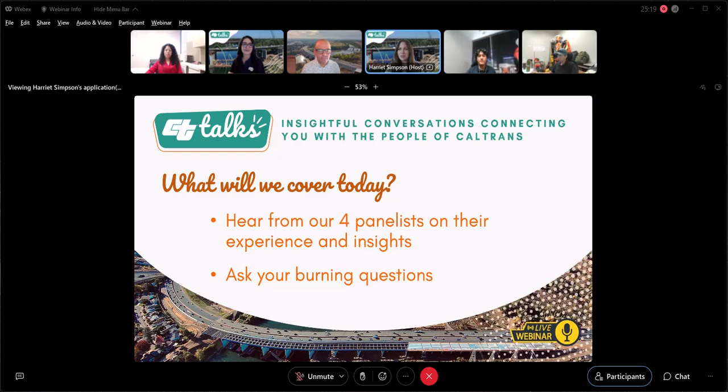And as Laura said, you're going to have your opportunity to ask your burning questions, which we will pause to get to throughout the webinar. So without further ado, we've got 4 incredible panelists with us today: Luis Guzman, Mayra Velasquez Cano, Ivan Young, and Jimmy Ngo.

Hi, everybody. Welcome. Hi, thank you for having us. Hi, everyone. Welcome, welcome. Thank you so much for being here with us today.

So we've got some brief bios to share with you all today so you can learn a little bit more about our panelists, and then we're going to dive into our questions about this amazing project. So I'm going to kick it to Laura to start us off with the biographies.

It's my pleasure to introduce you to Luis Guzman. Luis is a transportation engineer here at the Office of Structure Construction in Sacramento. He holds a Bachelor of Science in Civil Engineering from California State University, Fresno. As a structure representative, he oversees bridge construction projects, ensuring quality and adherence to contract standards. His expertise includes 3D modeling, project management, and strong interpersonal communication skills for project success. Outside of work, Luis has a deep passion for automotive and motorcycle mechanics. He is often found in the engines and customizing vehicles. He also loves the thrill of driving and riding, appreciating the engineering and the freedom these machines provide. His favorite pastime is creating great memories with friends and family. Thanks for joining us today, Luis.

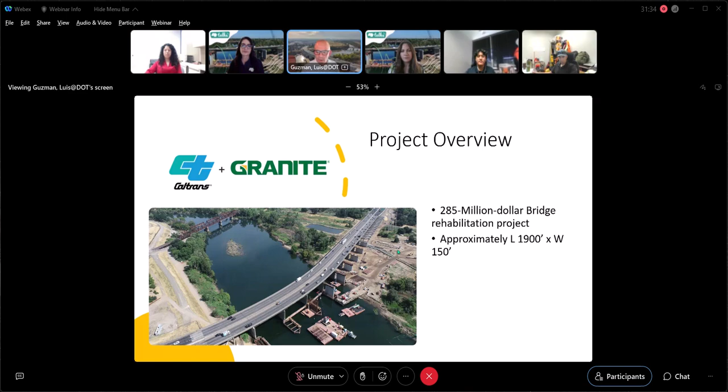It's for the American River Bridge project. This is a CMGC project, a joint venture between Granite and CEC. It's a $285 million bridge rehabilitation project. The purpose of the project is to replace the existing deck that has been identified as something that needs to be updated and brought up to current standards. The bridge is approximately 1,900 feet long and 150 feet wide.

I'd also like to thank Mihai. He's our Mets representative, so he was instrumental in the fabrication of the steel. He made sure that everything was fabricated according to plan and specifications. Mark Okamura and Wes Sennett, they're the bridge designers for the project here.

Terry Harper, the office chief surveyor, specializes in remote sensing. He created a LiDAR scan of the bridge before we started construction. We needed to identify how much upward deflection we'd have when we removed the deck, and his LiDAR scans from when we started the project, compared to what we had after we demoed the overhang, allowed us to calibrate a very sensitive model created by the bridge designer. That was instrumental. So thank you, Terry.

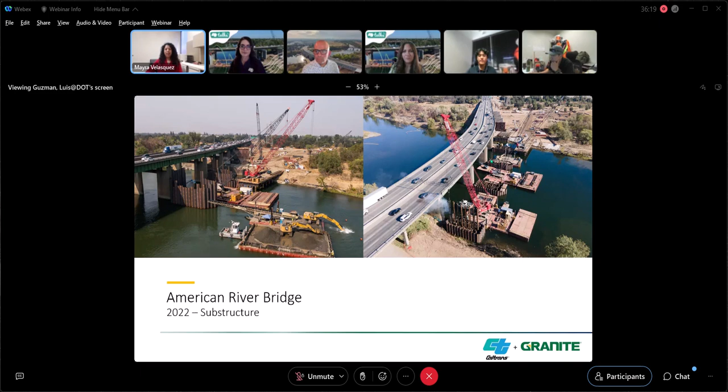Piers 8, 7, and 3 are temporary cofferdams. Piers 6, 5, and 4 are permanent and will be used for pier protection, which the existing bridge will also get from piers 6, 5, and 4. When I say they're temporary cofferdams, once we build the footing and the bridge itself, we're going to remove those sheets.

In this picture, you'll see that the contractor used the total station to locate the exact location of the cofferdam. These pins are temporary and will be removed. The next step will be to place the waler, which is a template that helps us guide the exact location where we need to drive the sheet piles. If the sheet piles don't go in the right location, we run the risk of the cofferdam not closing at the end.

The Caltrans surveyors take a big role in this portion, because without them, we wouldn't be able to construct the cofferdam where it should be. So thank you to all of them.

Ivan, do you want to explain the way the total station works? Basically, the total station shoots a laser into a prism, a glass prism, which does all the trigonometry and calculations for you, giving you the distances and angles of the exact point you're set up on, or that you're shooting. With that, we were able to input those points into our 3D model to confirm that things are where they're supposed to be, that the structure is being built where it's supposed to be.

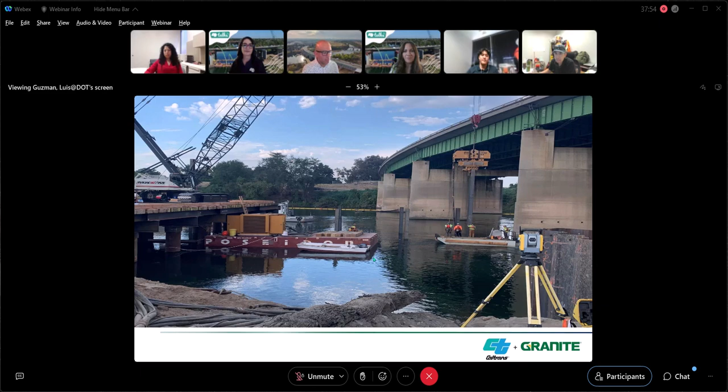Okay, next we'll talk about the superstructure work here. So what you see here is the barge, and it's setting the steel girders. These are 120-foot long steel girders. They were prefabricated and pre-drilled at Vigor, the fabricator in Washington, fabricated as part of a child project ahead of our parent project. We had to build all the substructure to be exact, and Jimmy will talk about the specifics.

These girders come in and fit perfectly, right? That's the whole goal, the whole purpose. So we use Trimble X12 to scan the girder itself. There's a design phase and then an actual fabrication phase, and we want to make sure everything is scanned into a 3D model to make sure it fits.

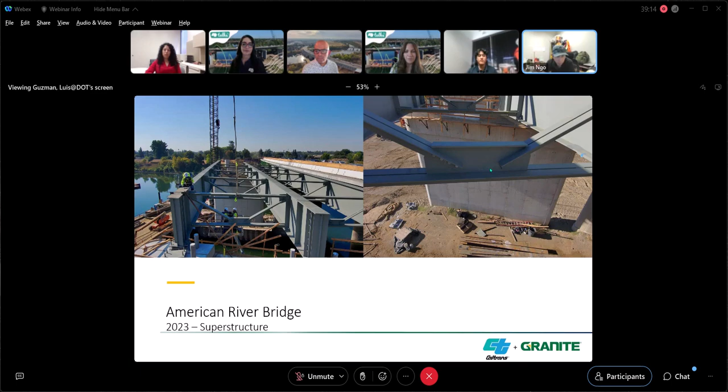Another technology we use is the drone. Whereas you slide these girders in, you have to brace them with the K-frames, and each K-frame is designed for a specific location as well as the bay. So they come and arrive on the job site with a tag, the manufacturer print on it, the number. We make sure they bring out the right number, and we have our team on the ground checking it. What I prefer is to mark a number on the steel K-frame.

When the contractor installs it and completes it, instead of the old days where we'd have a barge and a man lift, which takes hours to set up and bring you up there to check, you pop out a drone within 15 minutes and I know exactly that the K-frame is at the right location. You can see right there, it's marked CF2, span 8. That means at span 8, that CF2 is at that location.

So with the drone technology, it helps speed up this project very fast because we can cut down the inspection time dramatically. Here on the right, you can see all the bolts, making sure they are not loose, that they're properly tight. How do we get up so close? Drone, right? It can get very up close.

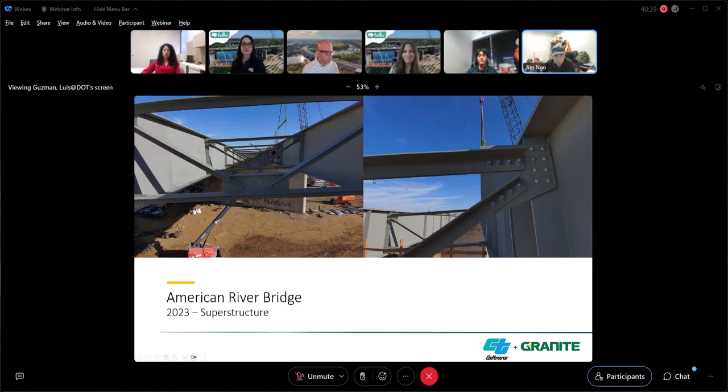Another innovation we use here: our typical process uses grading dowels for our decks. The way that typically works is you stick a piece of rebar or steel rod into the deck, put duct tape around it, and notch it. Then you use string lines to ensure the profile looks right, that the grading all looks correct. What we tried on this project is that both Caltrans and the ARC contractor used total stations and GPS units to set everything. So we graded the entire deck without any of the grading dowels.

We used a 3D model of the deck, and it was all dynamic, so you didn't have to have a specific location—you could walk anywhere on the bridge to set that. Jimmy and Mayra will talk about that.

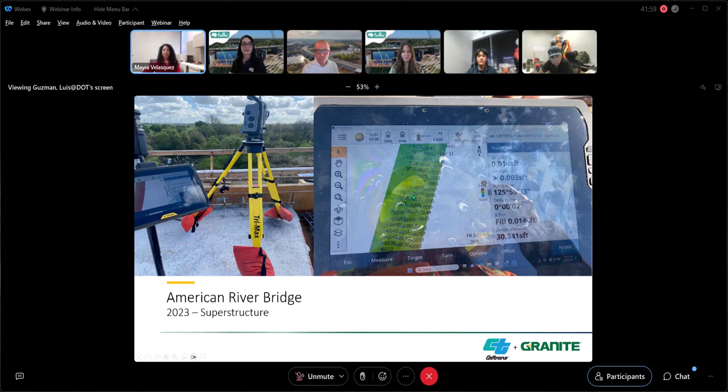Once Luis has given us the model, I go out to the field and start surveying. On your left side you'll see the total station, and on the right side you'll see our screen. Once I go out to the field, I first survey the girders, the top of the girders, and that will give me a fill. Once I get the fill, with these numbers, a contractor is going to be able to construct the pan decking.

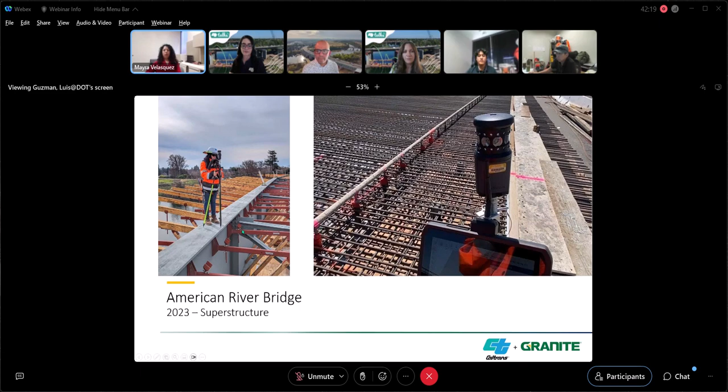Once all the rebar is installed on the deck, we go back and survey the overhang, the closure pour, and the bidwell railing. The really cool thing about this is that the total station can be used anywhere on the bridge, and it will tell us exactly how far we are from our target, so we can adjust it either up or down.

Also keep in mind that Caltrans and the contractor always compare our numbers before anything is finalized. So it goes through a couple of people before we say it's good.

Okay, we'll hand it back to you, Harriet.

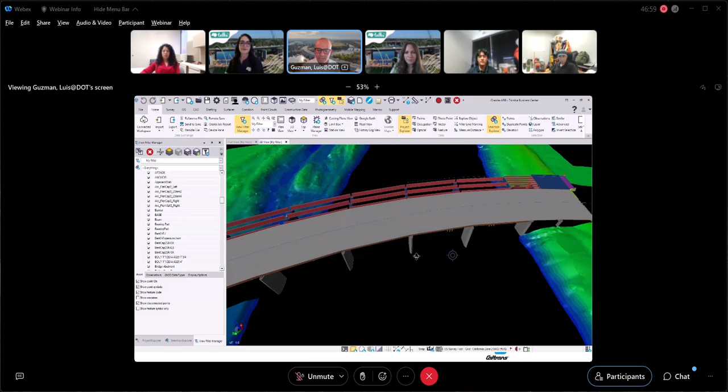They actually, here, let me share something, to give you a better idea of what that looks like. I'm going to share the model here. This model is a combination of 3D scans, the Tekla model, and roadway design, so it's a little bit of everything, but that's about how deep they go here. These were designed to go about 60 feet, and these are on piles. So this is kind of what you never really get to see, it's all underwater or underground. These are called piles, so we drive these piles down. These were CISS piles, so they're hollow. We drive them down, fill them with concrete and rebar, and then build the footing on top. That gives a lot more stability there. And then we pour walls, pier caps, and then our girders on top.

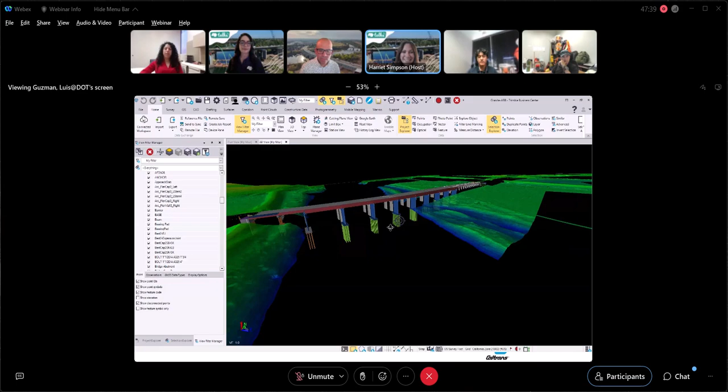Great visual, yeah, that definitely helps. It's been a struggle, I'm not going to lie everyone, Laura and I come from HR communications talking with engineers. It's been a struggle with our communication, but you guys are doing a phenomenal job making sure we understand all these different technical elements. We've learned a lot.

So I typed down the answer is actually 14 feet for the bike path. 14? Okay, yeah, for the bike path. Cool, okay, nice, all right.

Well, to jump into question two, you spoke a little bit about the innovations that have been utilized, but would anyone like to share a little more about maybe a few of your favorite innovations, or anything that has highly contributed to the success of this project? Good, Mayra, you start, I'll add on.

Surveying, maybe total station, data collector. We've used the total station a lot, it's really amazing, I've loved it. We used to do a lot of surveying with other equipment, old style. Now with the total station, you could go anywhere on the bridge and it will tell you exactly how deep, how far down or up you have to go. It doesn't have to be an exact location, you could go anywhere, and with this it will help the contractor build it. If we need to adjust it, we could adjust it right at the spot. It'll give us elevations, it'll give us the point exactly where we are. Yeah, I really love it.

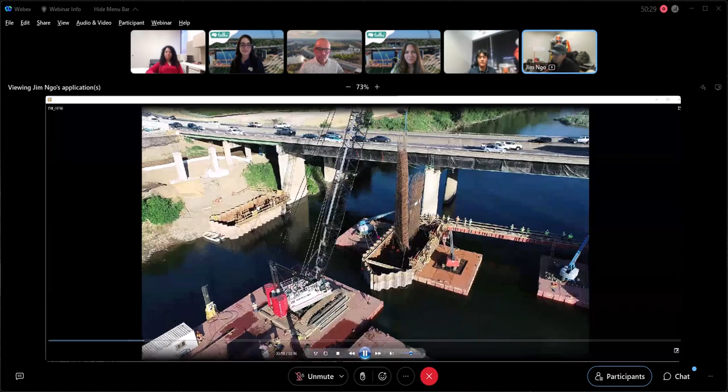All right, you save a lot of time with a lot of this inspection. You can see behind this, this is what I'm talking about earlier. You have to have a barge and a man lift and a boat take you out here to go up and inspect the K-frame and other stuff, like paint and so on. But with a drone, you can do that in 10, 15 minutes very quickly. It also provides a really nice visual video documenting the process and stages of how far the construction has gotten.

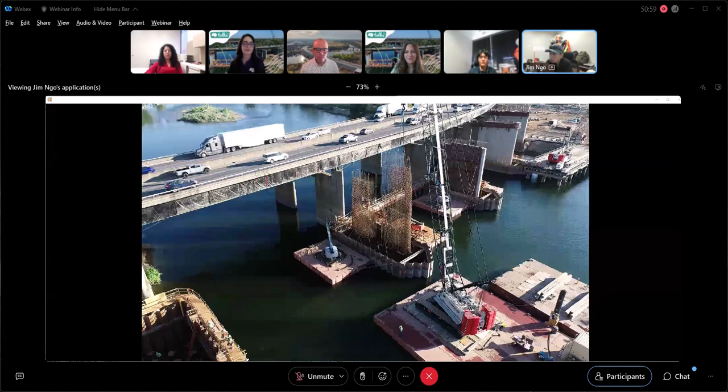And I always like to make those kind of videos to show the public, to say, oh, we did 3 cofferdams today and we're at the pier, we're halfway to the bridge, and you can kind of see the progress of how the construction on that project is going. So definitely drone is innovative.

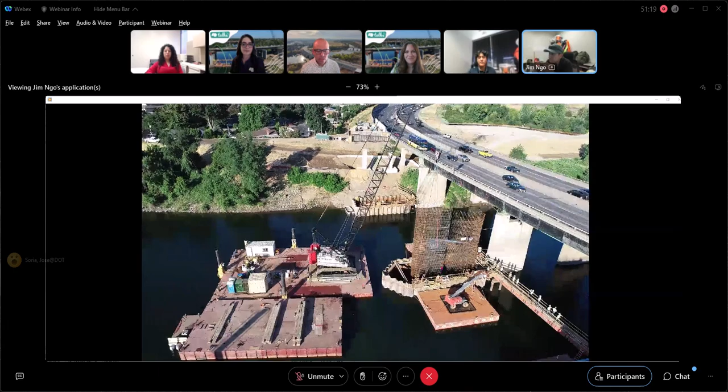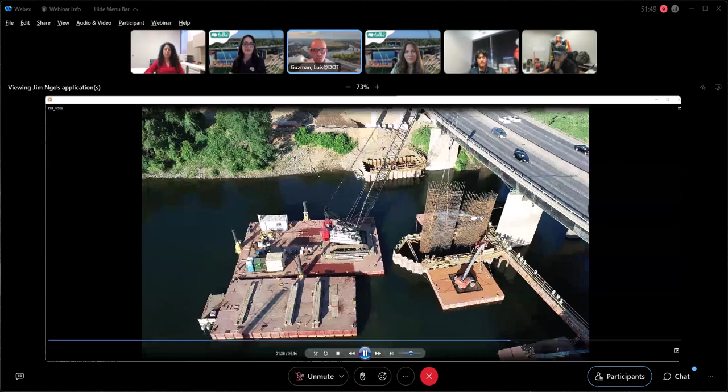There was also a couple situations where those large cages were guy-wired onto the sheet piles, and we couldn't really tell whether they were plumb or not, because they're so tall and you're down there in that cofferdam, it's really hard to see. So Jimmy went out and flew that, did an overhead shot, and we clearly could see that it was leaning. We were able to identify it was a safety aspect, stop the operation, and fix that safety issue. It was because of the drone that we were able to identify that and eradicate it.

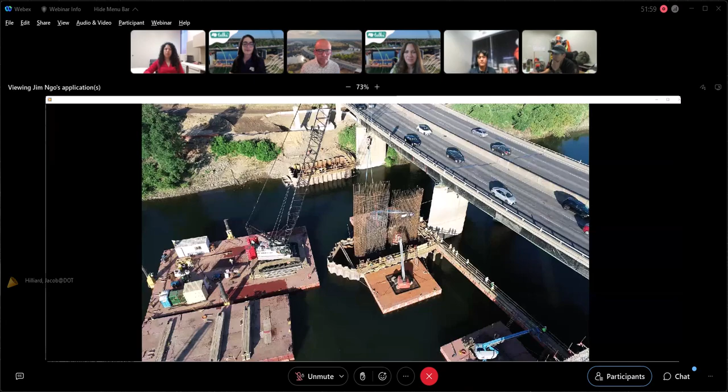Awesome. Well, while we're on the topic of drones, maybe we can tap the chat for a couple of those drone questions. Laura, were there any in particular that you saw? Yeah, they were just asking if drones were deployed for any of the activities, surrounding that. I think the guys did a really good job answering that and showing that great footage. But there is a question there.

I do have one maybe someone could address: they were wondering why there's still steel girders and not precast concrete girders used in the bridge.

Yeah, I'll go ahead and answer that. The reason is that the existing bridge is a steel girder bridge, so it was kind of designed to match the existing one. But having precast or steel girders does, by nature, expedite the construction, because if it wasn't, we'd have to build maybe a box girder bridge, which is a lot slower to build. So that definitely did expedite it, and we fabricated a lot of those girders before the project started. Like I was saying, we broke it up into child projects, and those steel girders were fabricated about 9 months before we actually started construction on site. So by the time we did that, everything worked out.

Normally you'd have to wait till you award a project before the materials are procured, so that would have added another season to the project had we not done that. So there's a cost savings and a time savings by doing that, and steel girders are definitely a lot faster to arrive on site and construct.

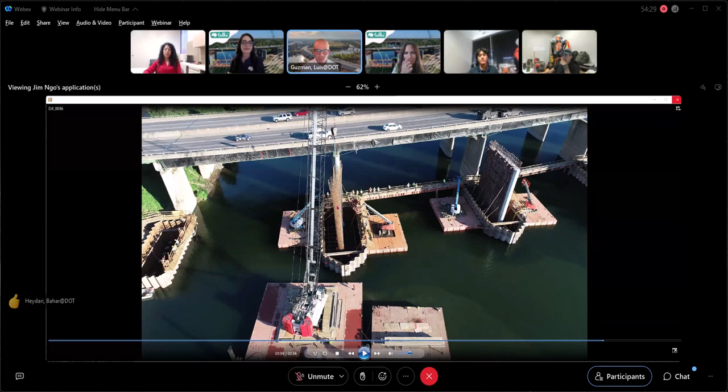It's northeast of downtown Sacramento, usually where the state fair is at, Cal Expo. It's right over crossing downtown Sacramento, into Arden. That's the best way to describe it. I could share a Google map if that might help see where the project is located.

Let me go to that and I'll share that. And while you're sharing, maybe if there's anyone local to the Sacramento area, give a heart if you've driven over this bridge since it's in its current state, because I know I did, and it's so smooth and comfortable to drive over. Has anyone in the audience driven over this bridge?

There you go, there you go. We just switched the traffic over literally about a week ago, so it's really awesome. I have to say, after we've been invited multiple times to come out there with you guys and do tours of the site, when I did go over the bridge, I was like, wow, it's open now. So exciting to be on top of it where we did the tours with your team. It's just amazing.

Nice visuals here, Luis, thank you. So this is downtown Sacramento here, you can see all the buildings, and this is where we're at, crossing over that river there. That's one of the main thoroughfares. We get about 100,000 cars that cross this bridge daily. Wow, so it's a main corridor out of Sacramento.

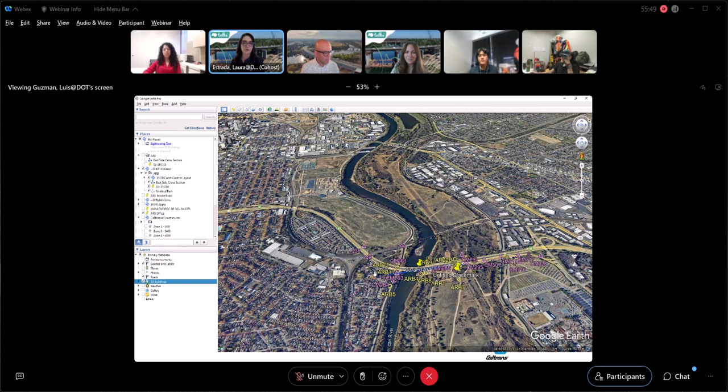I do have another question I saw in there. Maybe now is a good time, but they're wanting to know what difficulties did the team face while designing and constructing the curved segment of the bridge? I'm not exactly sure what by curve, what are we talking about, the bike ramp? It doesn't really say specifically, but just looking at the photo there, it looks like it's curved, I guess, and they're wondering if there's any difficulties.

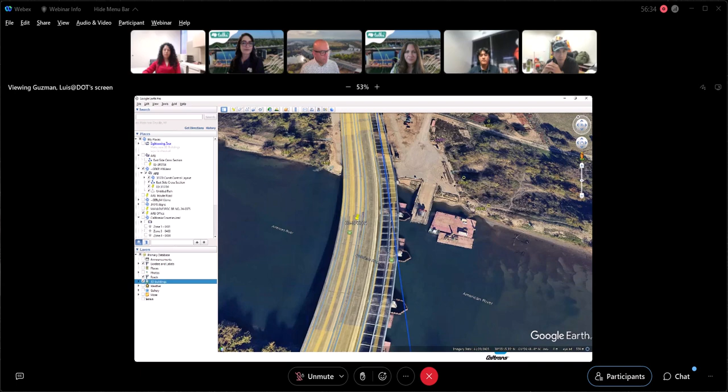Oh, I get it, part is the super elevation and the horizontal curve and vertical curve, Luis. Okay, that makes sense. We have 8% super elevation, right? So our girders coming in, a K-frame, everything is designed for that particular area. So like Legos, you have to match them exactly where they're at. So that's the difficult part, how do we make sure that things get like Legos correctly. That is one of the challenges.

If you could see the way it worked out, because of that super elevation, I don't know if you can see how much embankment there is, but it's at 8%. So what that means is every foot you move over, the elevation is 1 inch higher or 1 inch lower. So when it comes to erecting these steel girders, 1 inch could make a huge difference.

That's probably the biggest constraint we had on the project, and this 3D model and the roadway models, they all kind of put everything together. We could see if there was any conflict, and were able to address them before we actually constructed anything. There were a lot of challenges, and one of the main things was making sure everything lined up correctly, because everything was bolted on, so we had to make sure everything was geo-referenced correctly. That way, when they came in, the Lego blocks were perfect, they just snapped right in and then bolted up, and we were done.

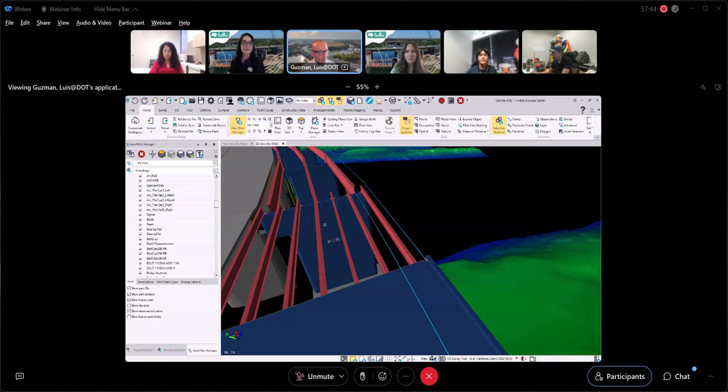Nice, it's just Lego blocks, right? Yeah, it's a little more complicated than Lego blocks. Keep in mind you have a super elevation, so now your anchor bolts have to be dimensionally different. So when you lay it out, that's also a difficult part, how you're going to lay out the anchor bolts correctly when you have an 8% grade and the pier is at a skew too. So you have all kinds of dimensions to play around with, and every pier you go from 8%, 7, 6, 5%, so it varies. You can't have one template for every single one of them. You have to almost custom your template for every pier and every connection with an anchor bolt for that girder, you need a particularly different template. So that's the difficult part.

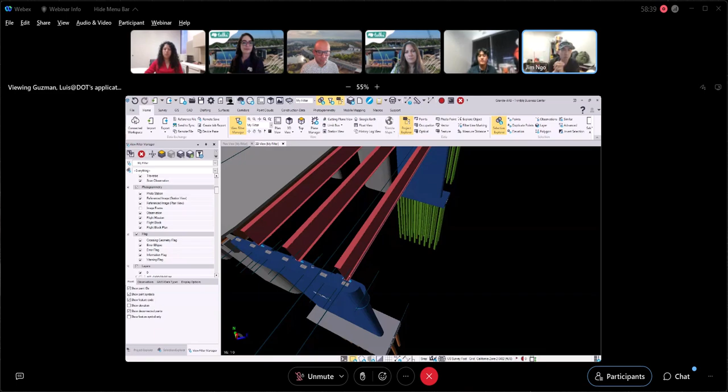And what Jimmy's talking about is this right here, and that's where these 3D models are just absolutely priceless. There, you see how those bolts are shown. Every one of these girders had a plate that was welded on the bottom, and they had pre-drilled holes, and those holes had to go right over this anchor bolt.

So that was the difficulty, being on a super elevation, a vertical curve, and a horizontal curve. The geometry was all different, so the girders were at different bearings, meaning they weren't parallel to each other. The elevations were different too. It was complicated, but it all worked out.

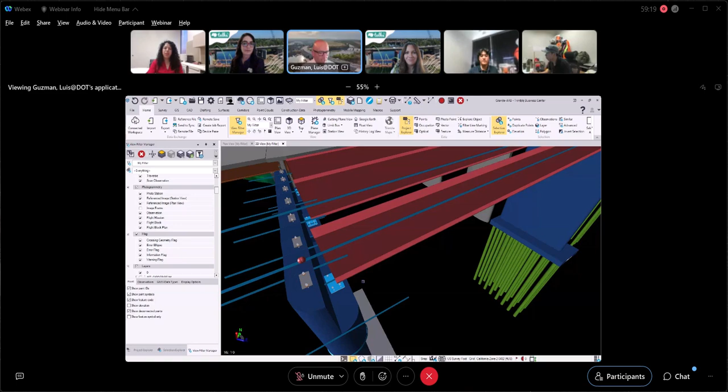One thing I want to add is that you have all this advanced technology, but it doesn't tell you how to do it. You technically have to know how to do it. The machine is for you to verify it. So at the end, you still need to know how to build a bridge. You use advanced technology to verify your work.

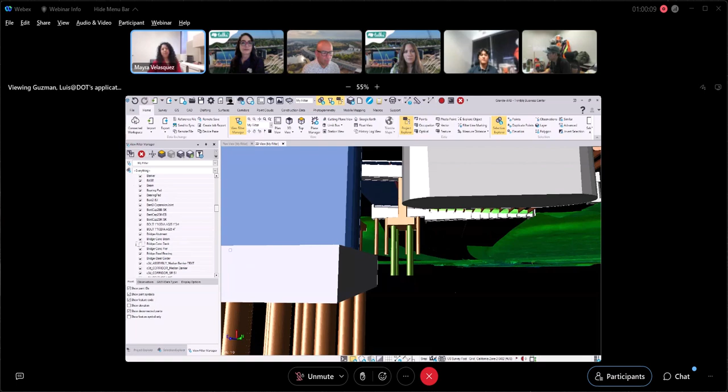Let's make that clear. I also want to add that the total station helped us extremely because, as Luis said, within a foot it changed the elevation. With a laser it would be very difficult, we'd need to know the exact location. With the total station, we don't need to do that. We could just move within an inch, 2 inches, 6 inches, and verify every point if we wanted to. We could verify the top of the rebar, verify anything as long as we know our target elevation. It gives you a wider range.

Wow, so this segues us quite beautifully into our next question, which Laura's going to present to you all, and we can kind of segue into that. Right.

Before I do that, I wanted to share a comment I received in the chat. Just a shout out from Francis Apia, who's a Caltrans senior environmental scientist, saying he loves the bike lanes and thanking us for the bat boxes and bringing the bats back. I wanted to share that shout out to you guys. That's awesome, hey, thank you.

Francis was one of our guests for our wildlife crossings recently. So that's the Cougar, the P-22 bridge, for the wildlife crossing down in LA.

There's so much content. We're on question 3, right Harriet? Yes, question 3. All right, awesome. So has there been any challenges along the way that we haven't discussed yet? Any other challenges? Mayra, if you want to start, or Jim?

I can start. We had a question earlier about how deep the piers were. For the piles, we encountered hard driving conditions, meaning we didn't meet the tip elevations. This was on the long spans in the water. We encountered over 100 blow counts within 12 inches, and sometimes the pile wouldn't even move within 3 inches. The soil conditions were different from what we expected, so we had to meet with Geotech and other knowledgeable people to come up with a solution. We then agreed the piles needed to meet an elevation tension before we could call it good.

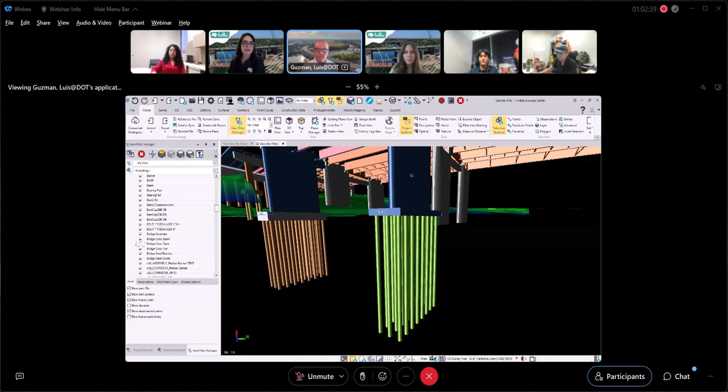So these, yeah, I like these, were seeing a little bit shorter. It's so helpful to see this visual while you guys are talking about it. It's awesome.

All right, anybody else want to add any other kind of challenges along the way? Yeah, we could talk about one more, Mother Nature. Here, let me share that here.

Let me know if you could see the video here. Yep, this is when we first started the project. You could see from the other picture, we were down here, so there was only water, at an elevation of 7 or 8. The elevation you're seeing here is an elevation of 30, and that happened overnight. Within a 24-hour period, the entire project here was underwater.

Mind-blowing. Yeah, so I'll continue that, and maybe Mayra, you could probably talk about the way we had to mobilize. I think it was on a holiday, wasn't it? Yes, exactly.

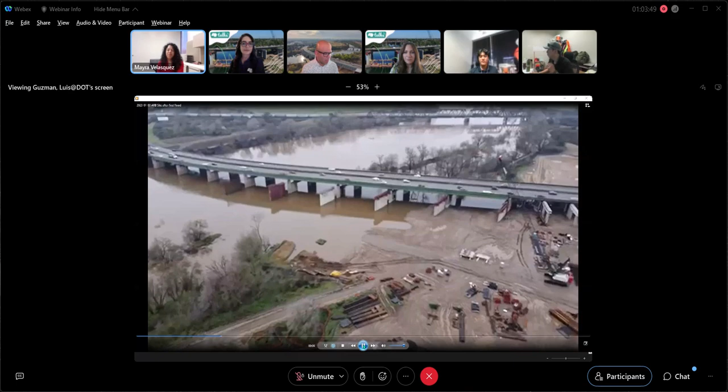So we actually started, I believe it was on December 27th at night. We got a call saying, hey, we have to move everything away from the job site because we are going to get flooded. We had to move all the barges, the cranes, everything, because everything was going to get flooded. Then I remember that on December 31st, right before New Year's, we finished at around 4 p.m. That was pretty crazy because I even thought we were not going to make it, or that all the contractors, myself and everyone, were just going to share New Year's together. Wow.

I have one challenge. Let me share my screen real quick.

So when you're talking about challenges, you have all kinds of challenges. For example...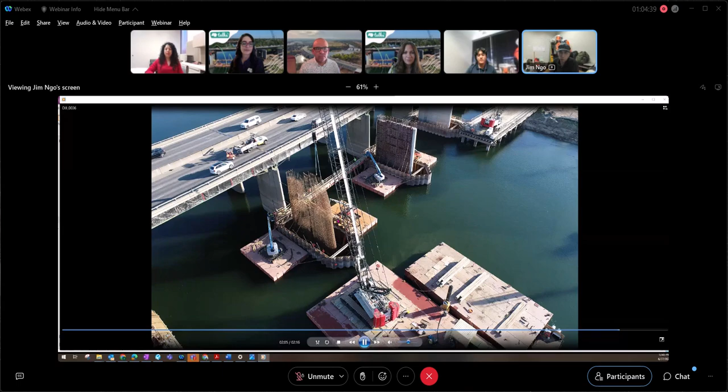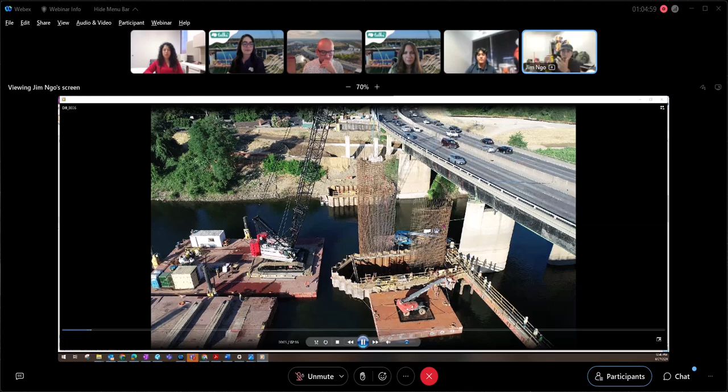Confidence, right? You make sure it's the right location. You have footing, you have to make sure the template is built correctly for the footing. You have pier wall, and pier wall now you have rebar cages. How are you going to marry those guys together? The horizontal bars, that is the ultimate. That's very, very challenging to get that in.

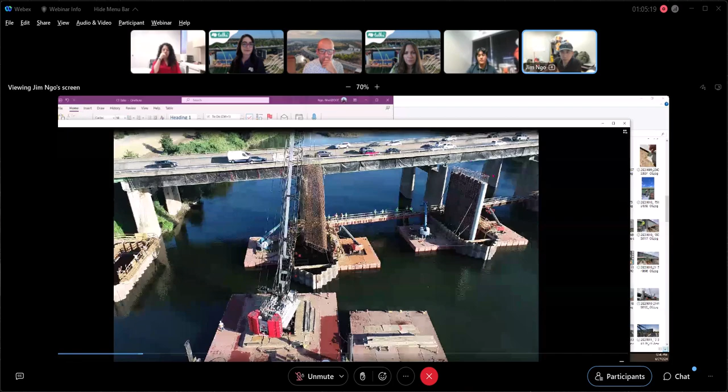But to me, the ultimate challenge is getting those girders to fit into the anchor bolt. As you can see, we have super elevation, horizontal curve, vertical curve. We have a whole bunch of stuff going on here, getting those both in correctly. But now you have girders flying in, and your goal is to make sure it fits. So how are you going to make sure it fits?

So we have to lay out all the sole plates. You lay them out so you know exactly where the edge of your girder is going to sit. Just so you can see it, that's how big the girder is. You can see the tolerance, right? That is very tiny.

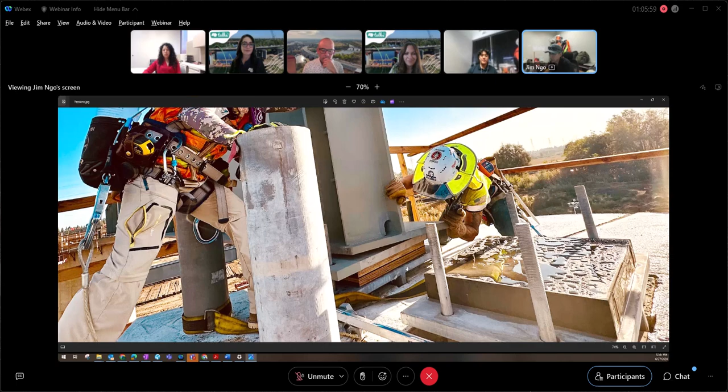So here I am up here trying to get the girder to fit in, the sole plate fit in, and get the girder to sit on the right spot. You can see right here, the layout and how the girder is. If you're talking perfection, that's what you call perfection. That's what bridge builders do, we make sure things are built correctly. So that is, to me, the ultimate challenge, getting the girders to fit into the anchor bolt.

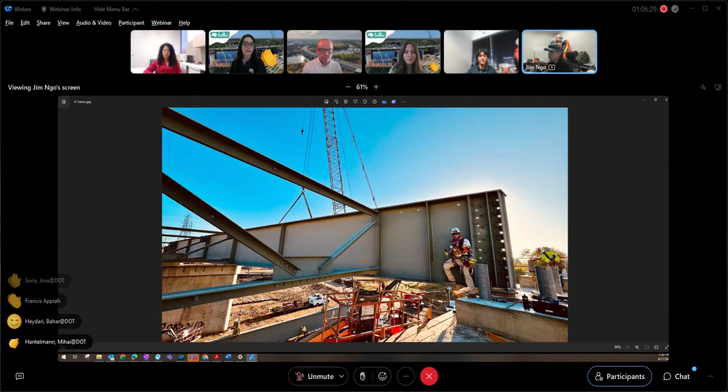And let me share. Such great visual, sharing all of that. Yeah, let me see. Sorry.

And here is a video of what we do. This is a live, uncut version. So here we have girders coming in. I'm up here trying to lay out all those girder sole plates with the mark of the line so we can tell the contractor, hey, land it right there where my mark is at.

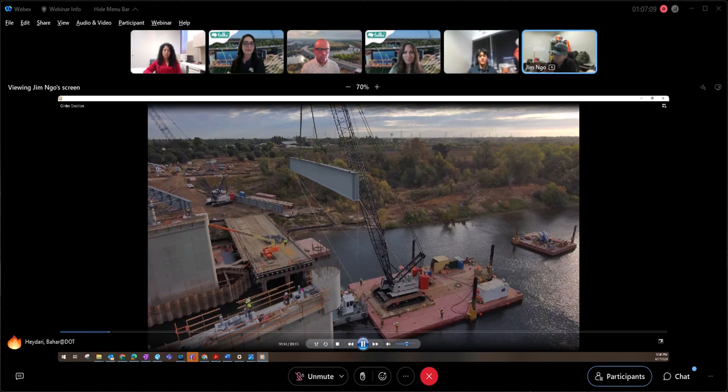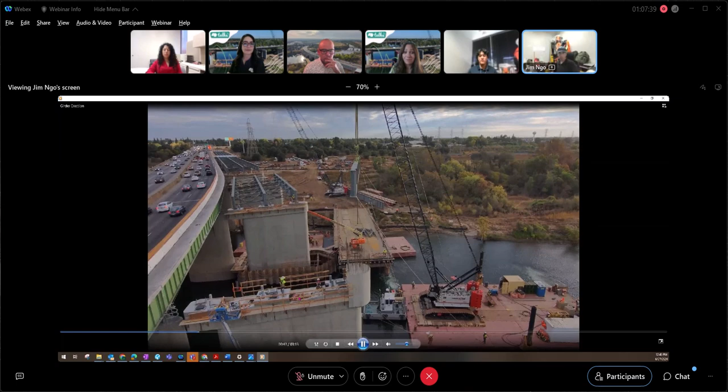And it's very difficult because this plate, you can see, is over 100 pounds. Me and him can't even lift this thing up, so I had to use a crane to lift it in. So now you get the sole plate in, marked, and now you get the girders coming in. So to me that is the challenge, the actual ultimate challenge, because what happens if the girders come in and didn't fit?

Right. Good point. Awesome footage, appreciate that. Yeah, so helpful to see that while you guys are explaining that to all of us, the hard work that goes behind building this incredible project.

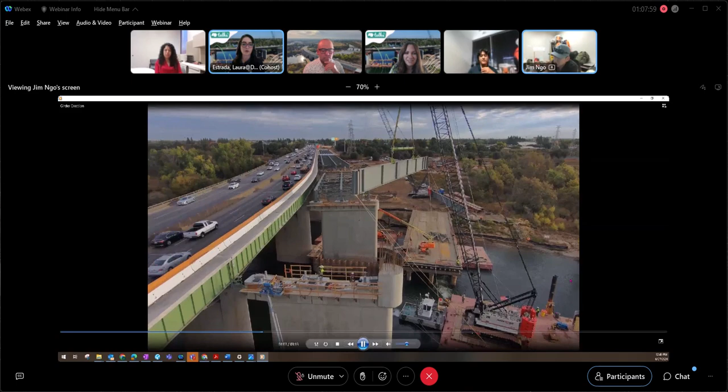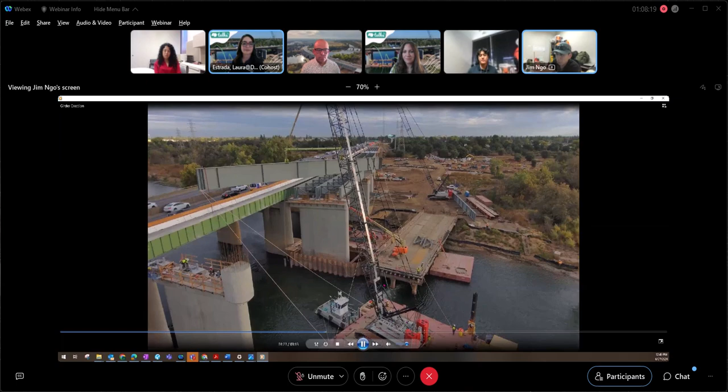You know, sometimes it's hard too because you have one crane, it is one pick. When you have two picks, a crane on the barge and another crane on the ground, when you pick this, the double pick, there's another story to talk about. So there are so many challenges. The operator on the crane on the barge must start before the guy on the ground. So there is communication and skill involved. It's very difficult. Sometimes we're able to set two girders per day, sometimes we can't. Sometimes the barge gets stuck. So that's always a challenge every day, that's what we deal with.

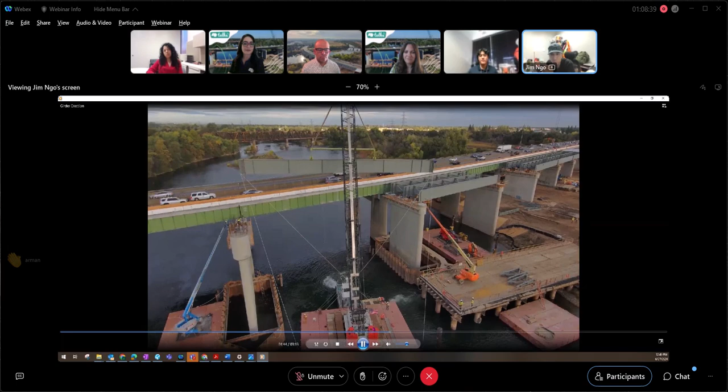Kudos to all of you for this hard work you guys are doing.

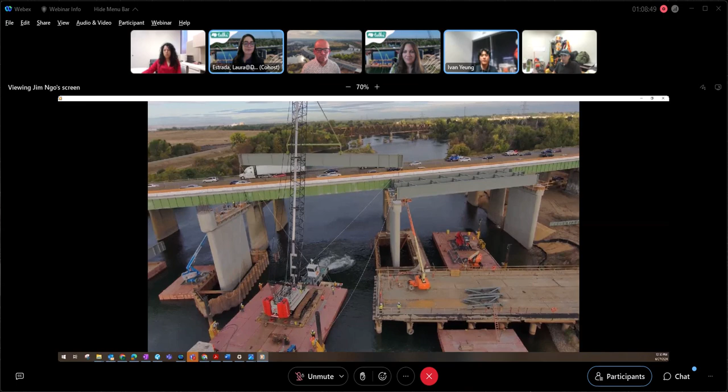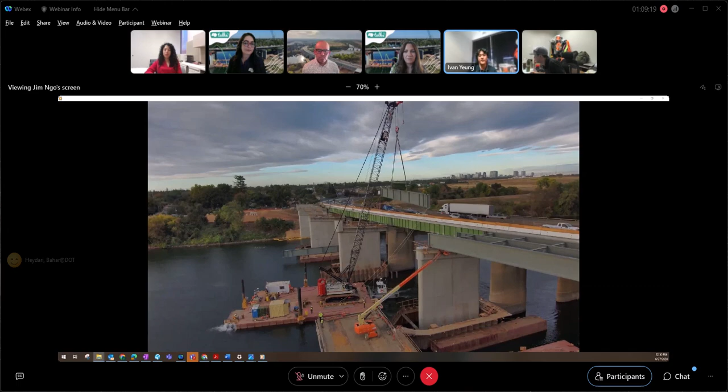Something I really wanted to add is the challenge of, since our bridge is so extensive and wide, the challenge of missing something. With our total stations, we were able to identify some ponding issues over at Cal Expo UC, which is an undercrossing. This ponding could essentially be unsafe for drivers and pedestrians biking across the bridge. With the total station, we were able to shoot those points, put them into a Civil 3D model, and our office was able to come up with a solution to fix that ponding issue. So the total station is good to verify stuff, but it also catches mistakes we sometimes make in the field. This technology has really been essential to our project.

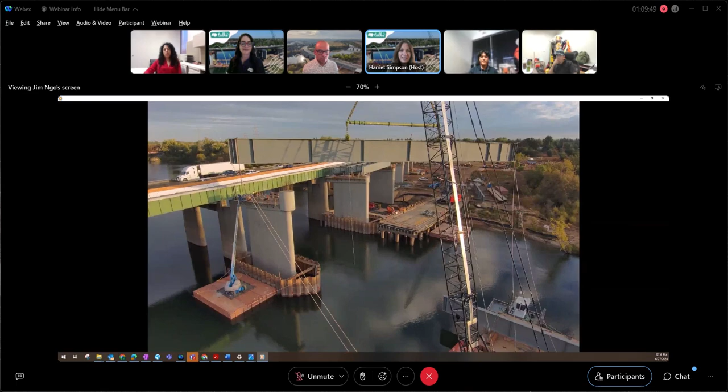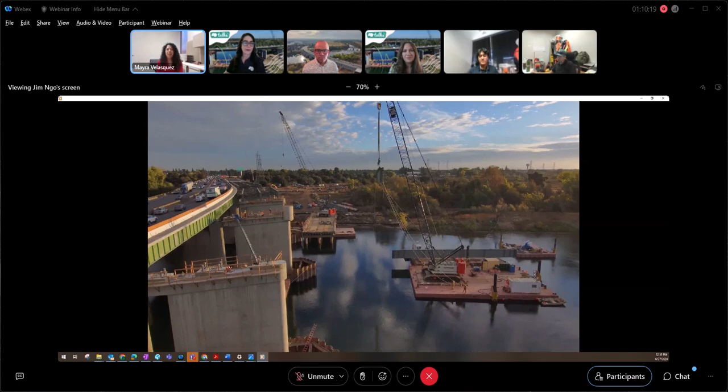I started as a computer engineer when I was at UC Davis, and I remember there used to be like 1 or 2 females in our class. So it was definitely very challenging, but not impossible. I knew it wasn't something I wanted to pursue, because I didn't want to be next to a computer for the rest of my life. I wanted to do something I could build with my hands, so I moved into civil engineering.

There's a little bit more women there, which was amazing to see. The only thing is that there's not enough, so we need a lot more women out here.

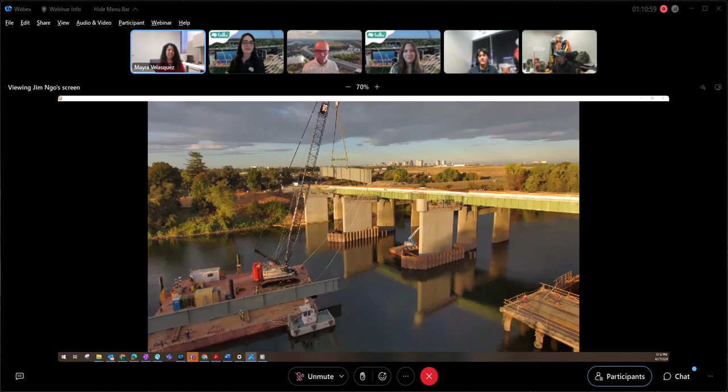Also keep in mind that you're always going to have people that are going to put you down. It's kind of hard because sometimes your own advisors tell you, are you sure you want to pursue this? Because this is not for women, this is for men. I even get nervous just to talk about it.

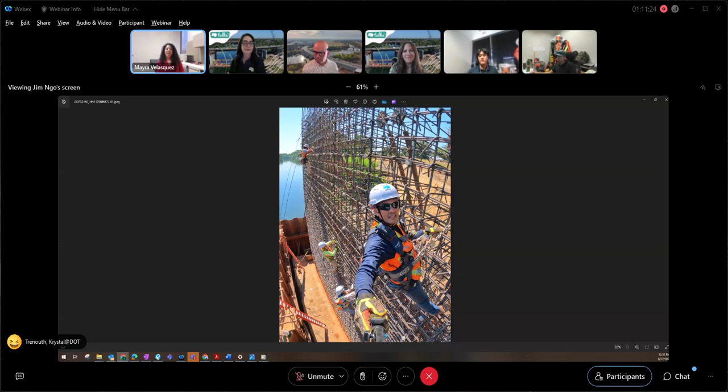Sometimes your own family will tell you, or people that know you, hey, are you sure you want to go into there? Because it's very hard, construction is hard. It's a male-dominant field, you have to be strong, yeah, it's very difficult.

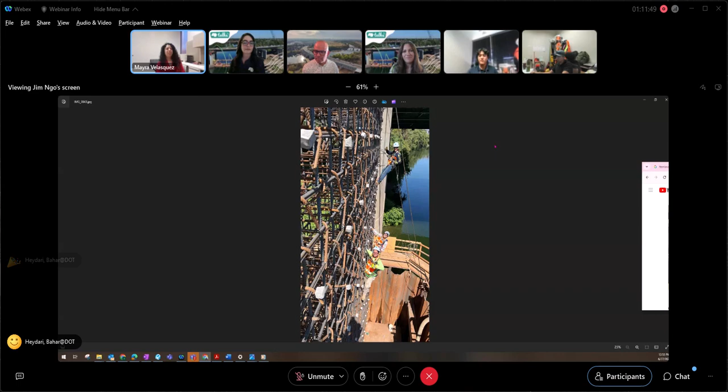In construction in general, it's been definitely challenging. But like they say, what doesn't kill you makes you stronger, right? And in our construction field right now, everyone's really, really nice.

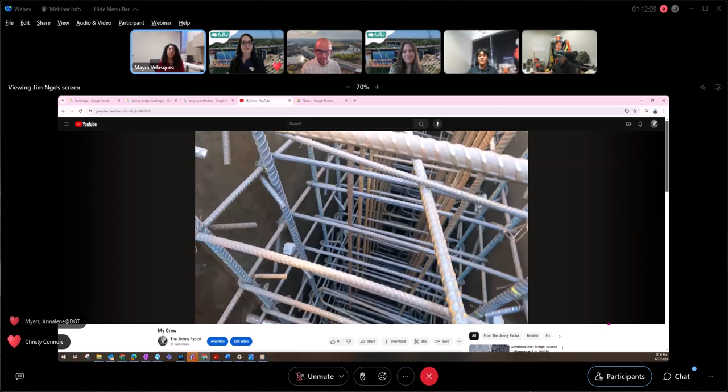I'm sure the males out there also have a very difficult time having a female inspector telling them what to do, right? Because I find it difficult for me to tell them what to do, and I can't imagine what they feel like having a woman telling them what to do.

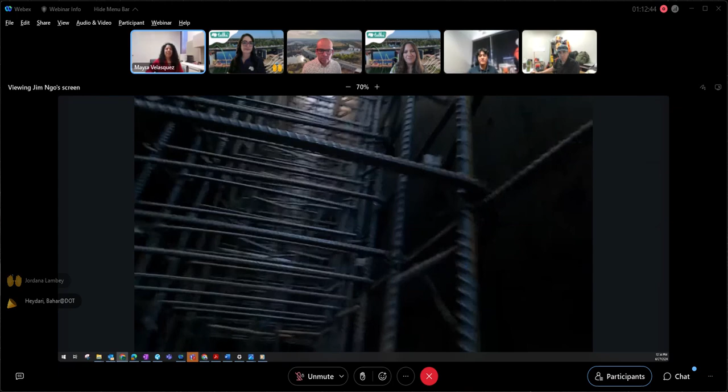I just want to tell all the females out there and young ladies that want to pursue construction: never give up. Pursue what you want to do despite whatever they tell you. I don't know how much to stress it.

There's a lot of women out there. Right now we have a few women in our office, some of them have been with us for a really long time. I've learned a lot from them. Some of their challenges - it definitely hasn't been a smooth ride, but it's getting better.

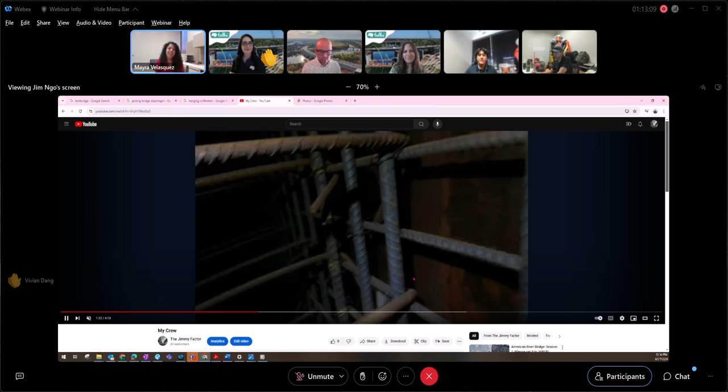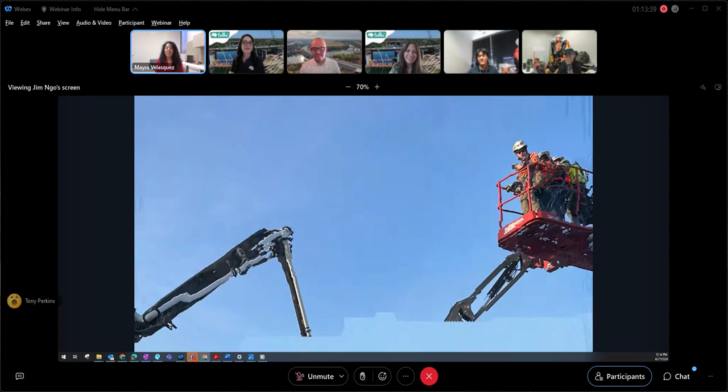I'm just nervous myself trying to say all this because it definitely is hard, but like I said, it's not impossible. Some other challenges you might encounter while out in the field - there's a lot of men out there, you have to use the porta potties and it's not always clean, but sometimes you have to use it. I don't know how much to emphasize it - women out there, please continue pursuing what you dream of.

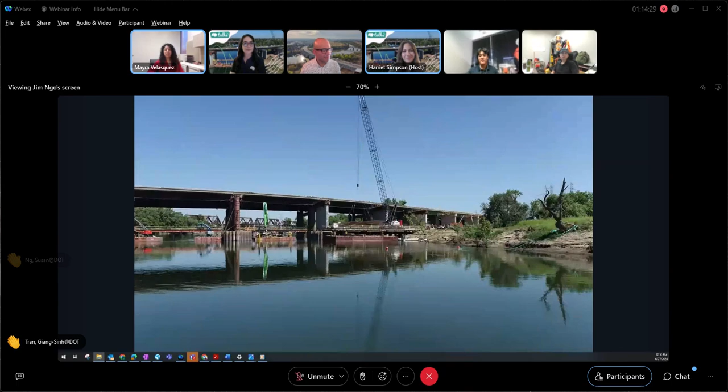We're also, just to add to that, very excited to have 3 young future engineers out on our job site, currently teaching them a little bit of what we do, and hopefully they can pursue their engineering after they finish their internship with us.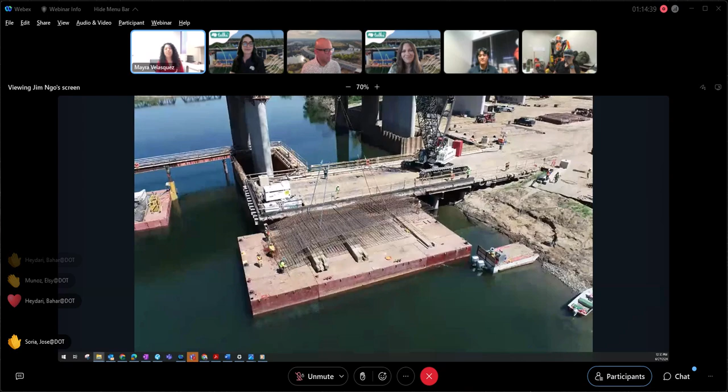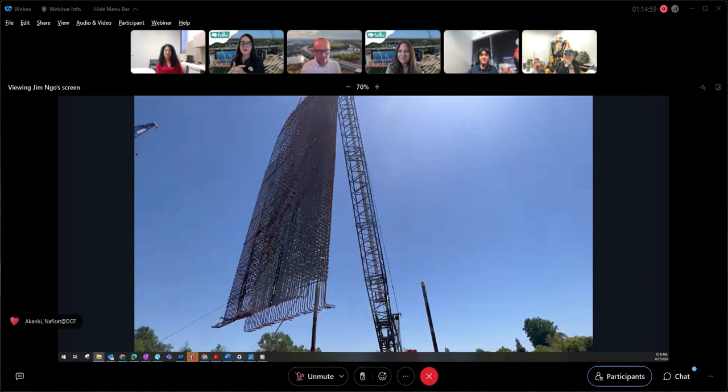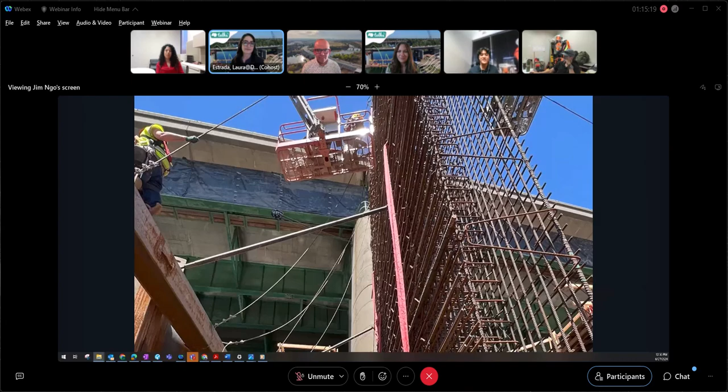That was a perfect lead-in, how you ended with that, Mayra, talking about our interns. So Ivan on our panel here is a current intern. I want to have you share your experience, what it's been like, where you're attending college. I'm currently still a student at a community college here locally around Sacramento.

I'll be attending San Diego State this fall. Being an intern at Caltrans has been really great for my growth in my academics and my passion for engineering. Being out here with all these people that are so passionate about engineering has really kept that fuel burning in me to pursue civil engineering.

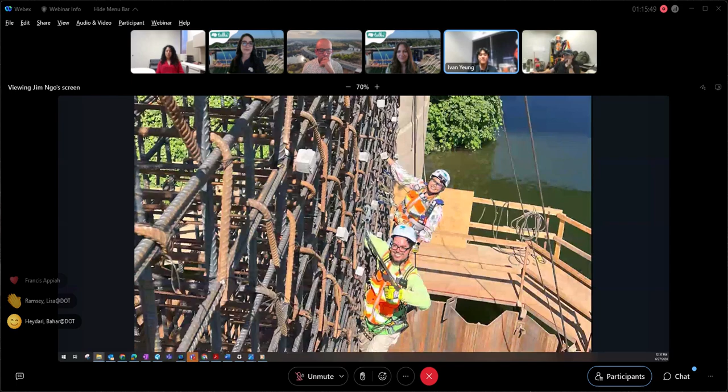In my surveying class I recently took in spring, being out there using the total station before I even knew what surveying is has really helped me help my classmates, setting it up, understanding what it does and what the point of a total station and surveying is, as well as my statics class. I understand better now why there are certain loadings on certain beams with these design constraints.

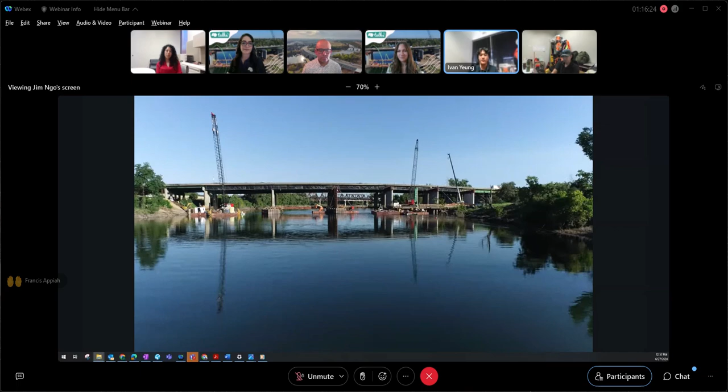Being out here, we see problems in the books and at school, but in the field seeing how it's constructed, we really understand why there are design constraints and these problems shown in the classroom. So having this internship has been really great, and I'm excited to continue my degree in civil engineering and hopefully work for Caltrans in the future. Thank you for having me.

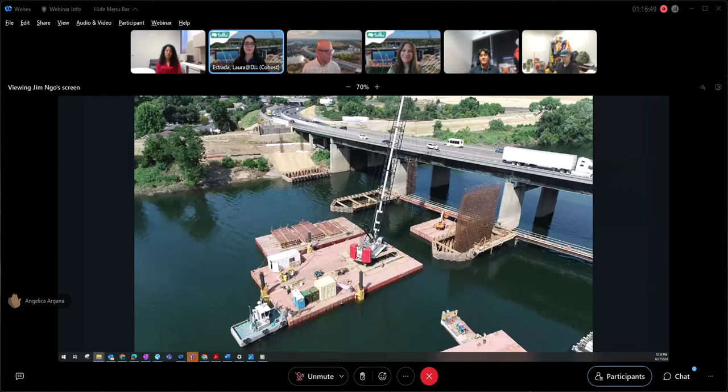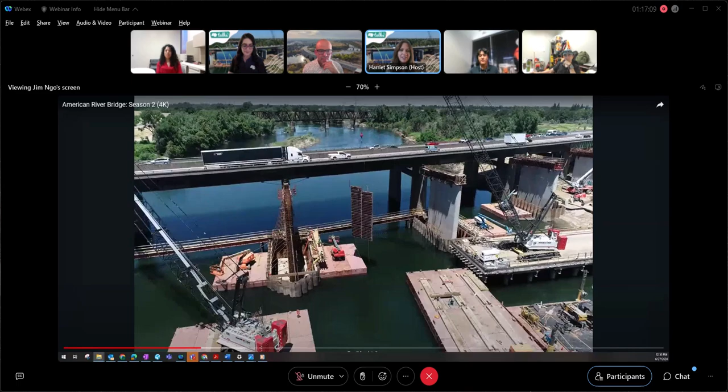Sure, there's so many technical questions, and our panelists have been gracious enough that we can gather these and send those out to you. There's a lot we won't get to in the couple minutes we have left, but a lot of people are asking what's the estimated completion date on this project, and are we looking to meet that target?

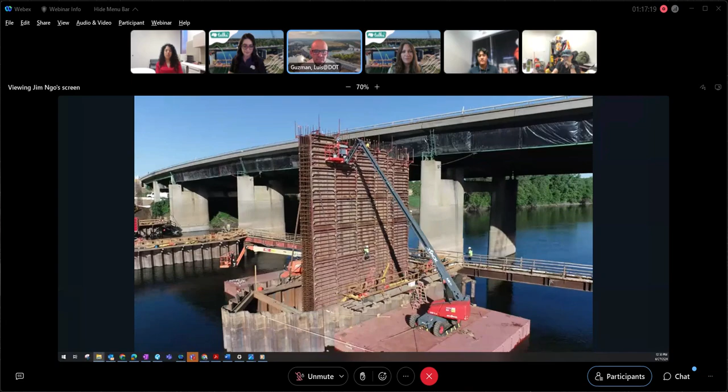The target date is fall of 2025, and it looks like we will meet that. We're demoing the existing deck now. I'm not sure, it was scheduled for yesterday but there was a little bit of delay. Either this week or the start of next week we'll start demolishing that first span of the existing bridge. Then if everything goes according to plan, we'll start pouring sections of the deck every other day.

Hard to find. Yeah, I'm just seeing a lot of shout outs, like Harriet said, for Myra, for everything you spoke to. We are hiring, anybody's interested. We definitely want some ladies to add to our crews for sure. You'll work with awesome people like Myra and get a lot of support.

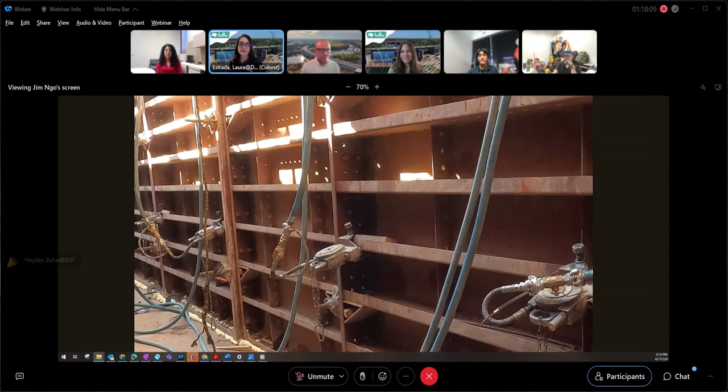Let's see, okay I like this one, you can all answer this, it's real short: how awesome is LiDAR on a scale of 1 to 10? Probably a 20. LiDAR's been very helpful for what we have done.

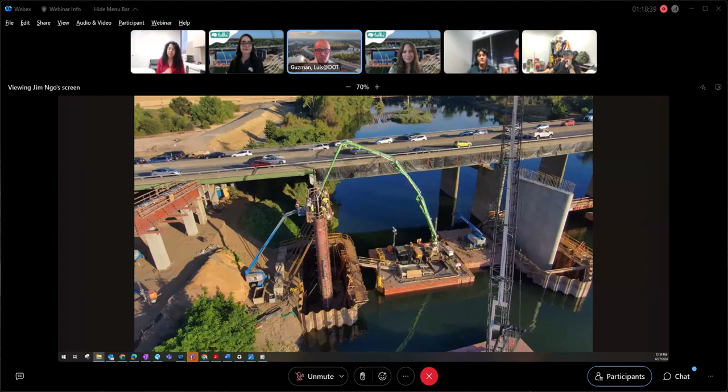Maybe, I don't know, we have time, I could share some of the LiDAR that Terry provided for us. Give me 1 second, let me see if I can share this. We were able to see the movement of the bridge, and it would have been almost impossible to do that with traditional survey, because surveying you're just grabbing one point. Here you're grabbing millions of points, so you can see the movement on every section of the bridge. Let me share what I'm talking about here.

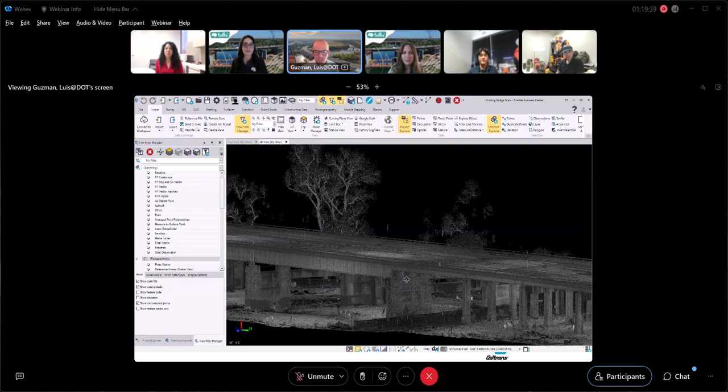Incredible to see that. Yeah, it's been powerful for us. We've been able to verify a lot of things we couldn't really see or that we missed, because you can't pick all this up with a traditional survey. There's really no good way of surveying the top of these girders, and that's one of the things we needed, and we were able to get that because of the LiDAR.

So there's one last question, just because this webinar was focusing on innovation on this project. Can you give us a rough idea of how many construction days utilizing this innovation and all these different technologies has saved you versus a more traditional approach? Would you say how much has it expedited the project?

Well, it's hard to quantify, but we haven't had any hiccups during construction. Sometimes you start building stuff and things don't fit right, and you have to stop, delay the project, and then you get change orders. On this project, thankfully we haven't had anything on the main structure that's had to stop—other than the flooding, everything has gone according to plan. So I would say if we hadn't used all the technology, we could have been delayed maybe 6 months to a year had anything gone wrong.

Yeah, incredible to hear this. And it's because you also have construction windows—when we first started the project, we only had a few months to build a lot of the foundation work, and we were able to do that because of the technology we've been using.